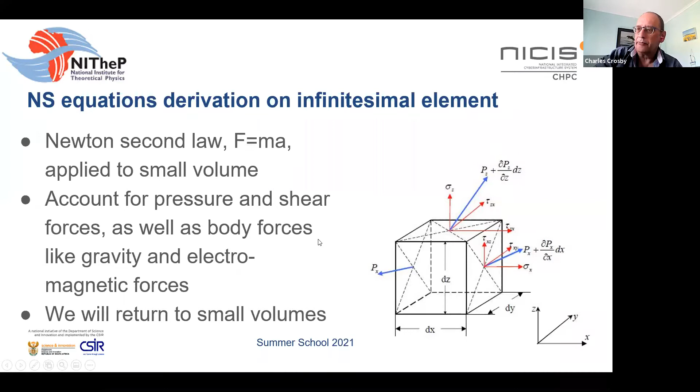Right, so this is one way of expressing the Navier-Stokes equations. This is a very longhand way of expressing it, but it is useful because if you're going to be programming it from scratch, this is where you would start, and actually you would start with a discrete form of this.

Although you've got a lot of terms there, you've got 4 separate equations: 1 continuity equation, which you can remember as conservation of mass, and then three momentum equations. They have been somewhat simplified, and there are 2 important simplifications that have been made. And the first important simplification is the density is constant.

This is incompressible flow. And this is a very big assumption, because we know when we're dealing with gases they are very much compressible. The density does change, and the density changes with pressure, and the density changes with temperature as well. But if we're not applying any fluxes of energy, we can disregard the changes in temperature, provided that the velocities are low enough.

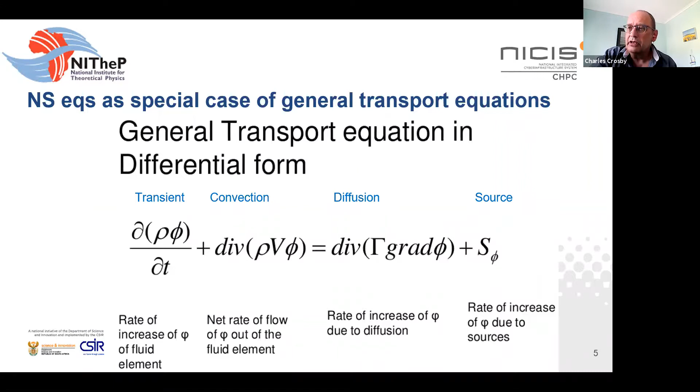So you've got a single equation which deals with both the volume of the control volume and its outer surface. So it's best expressed in integral form, which is how you use it in the finite volume method. So if you integrate it, it makes sense that you take the transient term and you integrate it over the volume of this control volume. Likewise, the source term, because it's a volume property, you integrate it over the volume.

But the surface fluxes are a little bit more awkward to handle. It doesn't make sense to integrate them over the volume. You would much prefer to integrate them over the surface. And this is where Green's theorem comes in. Green's theorem is a very useful theory that you find used in various forms of fluid dynamics, because it gets you away from having to deal with a volume integral when you're talking about a property that's not

really a volume property. So working with the normal vector on the surface of the control volume, the dot product with the quantity that we're dealing with, then we can start working with just a surface integral. So it makes it a form of the equation that's much more easily handled. So two volume integrals and two surface integrals.

Right, to summarize what we've talked about here, we've got a system of equations, so there's no single Navier-Stokes equation. You've always got a system of equations that you need to solve, and you need to find some kind of way of solving them together. You can solve them together in one matrix, or you can solve them sequentially. That's got fairly important implications. Especially on the convective side, there's very significant nonlinear terms, so you're always going to be stuck with some form of iterative method to solve them.

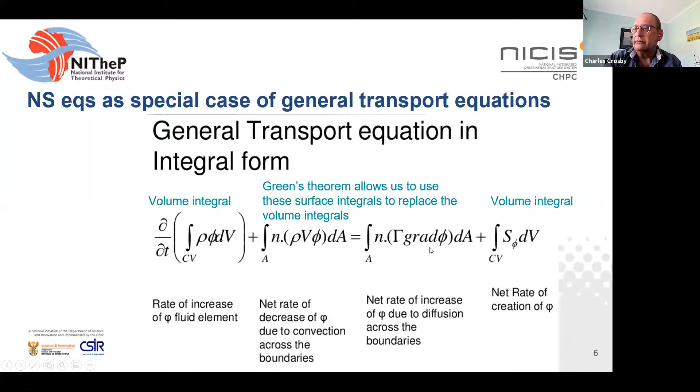But unfortunately, turbulence is a problem and we have to find ways of dealing with it. Fortunately, we found ways of dealing with it, but they do come with approximations. There are lots and lots of peculiarities of CFD, which we'll deal with in the third part of today's lectures. But one of them immediately pops up when you look at these equations. Let's just go back to this slide. This is simplified, but it illustrates the problem very clearly.

Basically, assuming that your viscosity and your density and your gravity and all that are known, you've got four equations and four unknowns. So your four unknowns are your three velocity vector components, u, v, and w, and your fourth variable is the pressure P. And conveniently, we've got four equations. So fundamentally, we've got a closed system. We should be able to solve this lot.

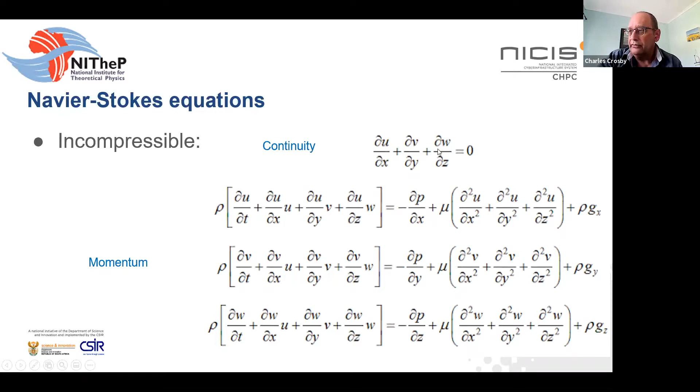The problem goes away when the flow becomes compressible because then density starts showing up in that equation and you can couple through the temperature and the energy, you can find the pressure. But if you're dealing with incompressible flows, which is where these methods started, you've got a fundamental problem that you don't have an equation for the pressure. You've got to find some kind of way of introducing it in there. We'll talk a bit about that in some of the later lectures. So that is the question of the pressure not involved in the continuity equation.

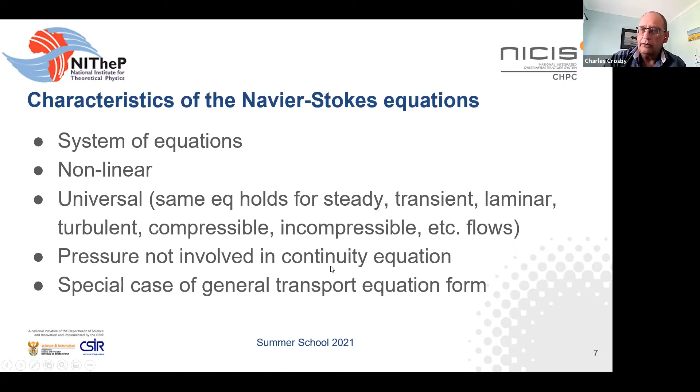And I've now basically given you a special case of a general transport equation, which is the Navier-Stokes equations, but you'll find that a lot of other things in the field of CFD start falling into the shape of a general transport equation. Right, so that's it for this part of the lecture.

Questions at this stage? Nobody? Should I pick a name at random and ask a question of that person? No, we're not going to do that. I just wanted to say that is a brilliant idea. I think that's not. I won't do that. I won't be that unkind. Okay. We won't be mean. Well, maybe we should be mean, but no, we won't be mean for now. Okay. If there are no further questions, let's get on to the second part of the lecture.

All right, is that clearly visible? Starting to sound like an optician.

Righto, I'm assuming that everybody can see this lecture 2.2 on turbulence. Right, I had to argue a little bit with myself about whether or not one should introduce turbulence into this series of lectures and whether it needs to come in once or twice, because I've already alluded to the fact in the previous part of the lecture that turbulence is inherently one of the things that makes CFD rather difficult. So it's easy to start talking about turbulence, because it really is a special thing which you don't really have an equivalent of in a lot of other computational domains.

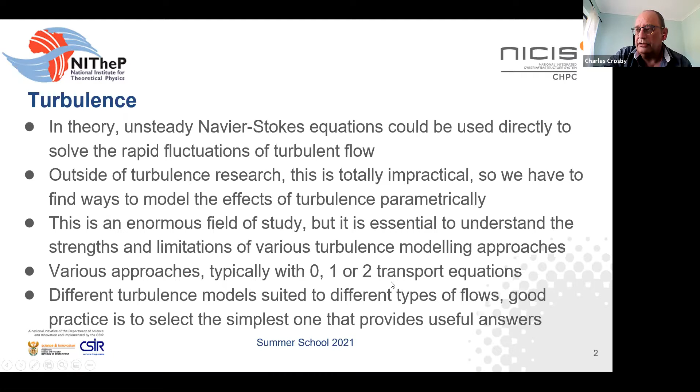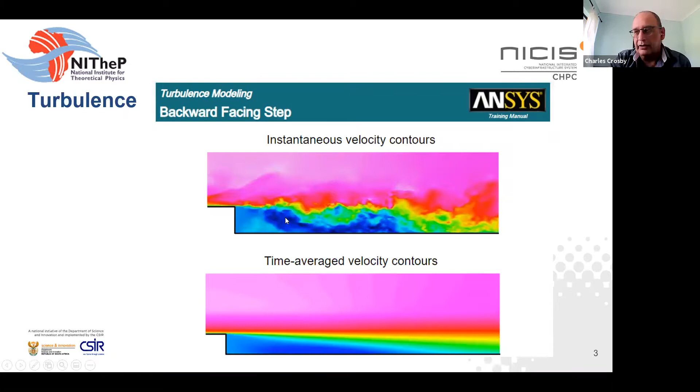So this is the trick with aircraft. They're nice and smooth and streamlined. So they don't have backward-facing steps. You don't have many regions on an aircraft that look like that, because they have to be nice and streamlined. Turns out you can simplify the equations a lot. And then you end up with an equation that can give you nice, fairly accurate pressure distributions over aircraft type geometries for incompressible flow.

And then if you assume that the disturbances normal to the mean flow direction are very small, you can come up with a compressibility correction factor, which is the square root of 1 minus the Mach number squared. And if you were to set yourself a threshold of that compressibility factor being effectively a change of 5%, then the Mach number that gives you that is 0.3.

So we like to use Mach 0.3 as a threshold of incompressible flow, because anything more than a Mach number of 0.3 is going to give you more than 5% of compressibility effects. So it's not a hard threshold, of course. In other words, if 2% compressibility is important to you for some reason, then it's actually technically compressible at a lower Mach number. In practice, you don't even need to go necessarily to a 5% threshold.

You could go to a larger threshold of compressibility for most practical purposes, and then you don't need to take too many compressibility effects into account until you actually start encountering shock waves in the flow, and then the whole thing breaks down.

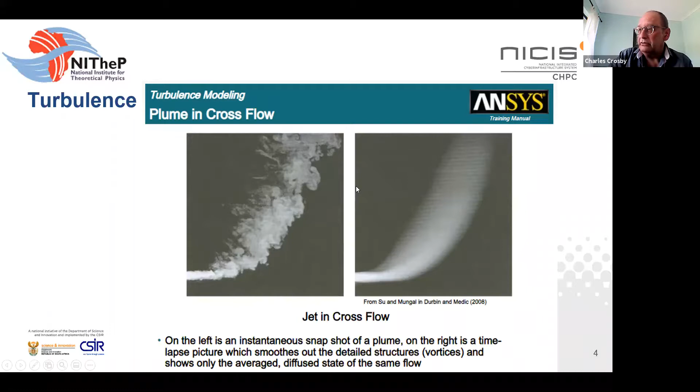Right, to move back to these lectures. The approaches that you can follow with turbulence modeling. For low Reynolds number flows, where the speed is small, the density is small, the sizes are small, but the viscosity is large, laminar flow is a really good assumption. All that the Reynolds number basically does is express a relationship between the inertial effects and the viscous effects. In other words, that which disturbs the flow divided by that which damps out those disturbances.

So at low Reynolds number, disturbances damp out, and the flow really is laminar. So there are quite a lot of real-world situations where laminar flows are important. And it can be a bit awkward because sometimes you don't want laminar flow. If you want chemical mixing, for example, you really don't want laminar flow. But if you've got small devices, you tend to get laminar flow.

Airfoils at small scales, typically model aircraft, some kinds of fans and things, also end up with laminar flow, and it turns out that there are some issues with laminar flows which make them quite difficult to deal with. So you'd actually rather prefer to have turbulent flow. From a simulation point of view, the laminar assumption is nice because you can use the laminar form of the equations. You don't have to worry about turbulence modeling.

So there are many real-world cases where you're dealing especially with small devices and low velocities where the laminar assumption is valid, and you should not use a turbulence model because the turbulence model is going to be inaccurate. And the turbulence model may not be accurate enough to effectively die off at laminar conditions. So then you should be using a laminar assumption. A good turbulence model will do that automatically. It will decay the turbulence to the point that the flow is effectively laminar.

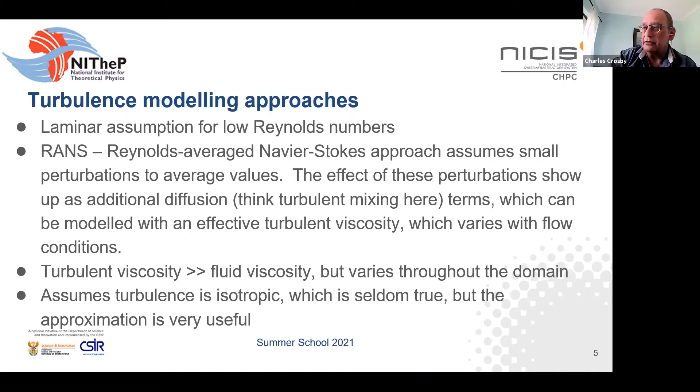Righto, so let's just go take a look, without getting into any great detail, at a form of turbulence modeling. This is a one equation model that's widely used in aviation, in aircraft analysis. It's the Spalart-Allmaras turbulence model, and it solves for a single transport equation of the eddy viscosity. So you're not dealing with higher level derivatives such as the turbulent kinetic energy. You're actually dealing with the turbulent viscosity itself. You assume an inflow boundary condition of very low turbulence viscosity, and then this gets amplified by gradients in the fluid, and it gets convected through the fluid.

So once again, you've got yourself a transport equation that's of a similar form to the other transport or conservation equations we've had before. You've got a transient term, a convection term, a diffusion term, and some source terms. And it turns out with turbulence, of course, you now get some very large source terms, because the source terms are now picking up a lot of the effects of the gradients. So these make the equations nonlinear. You've immediately got terms that you can see in here that are nonlinear. So it's like everything else in fluid dynamics, it's nonlinear, but it's quite a lot more nonlinear.

But this model has got a couple of advantages, and the one is that it's just a single transport equation, which makes it reasonably fast. It's got another advantage, which is that it works fairly well. So once again, you're primarily going to be using this with aircraft. Aircraft are streamlined. You don't have a lot of onset turbulence coming from somewhere else. So it's more important to take into account the effect of the turbulence that's generated in the immediate vicinity of the aircraft, close to the surface of the aircraft. And this has turned out to be particularly effective at predicting the flow separation on wings, fuselages, etc., which is one of the things that you'd really like to do with aircraft design.

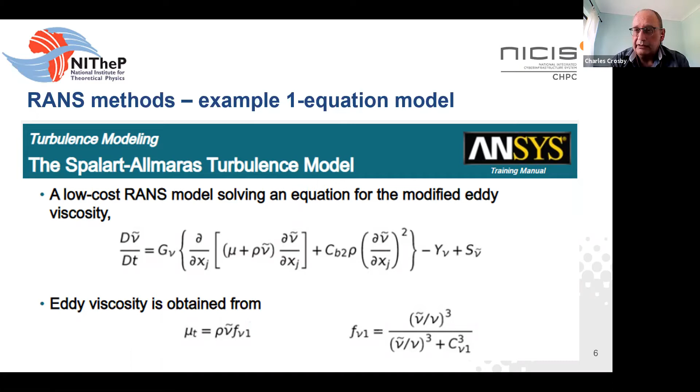So the Spalart-Allmaras model has been an unexpected success. It's worked extremely well in the industry. And interestingly enough, it gets a second life when it gets combined with additional models that do resolve the eddies out in the flow field. We'll talk a bit about detached eddy simulation in a moment.

Then you get into two equation models, and these models are the workhorses of CFD. This is where turbulence modeling first went effectively mainstream with the development of the K-epsilon turbulence model, which effectively says that you've got two things happening with the turbulence. You've got the turbulent kinetic energy, which is basically the generation of the turbulent effect. And then you've got a dissipation of that turbulence, which is epsilon. So you allow turbulence to be generated and you allow it to be dissipated. And the effective turbulence viscosity is a ratio of those two quantities.

So once again, you've got transport equations, you've got transient terms, convection terms, diffusion terms, and then a whole lot of nonlinear source terms. And then quite a lot of empirical constants, and deriving these constants has been one of the big developments in fluid dynamics, because a lot of them are not really theoretically derived. They have to be empirically calibrated, which gets you into the awkward situation that these models are not universally applicable. They work extremely well for certain types of flows. They can break down quite badly for other types of flows.

And these models have been further developed. The K-epsilon model was the original one. It was followed by models that try to address the shortcomings, such as the realizable K-epsilon model and the renormalization group K-epsilon model, which improved on a lot of the weaknesses and a few other things as well. And then a different family of methods, which is the K-omega models, which basically solve not for epsilon, but epsilon divided by K, a modified form of the turbulent dissipation. And this has also worked extremely well, but it's got its shortcomings. And then there's the shear stress transport model, which actually is a combination of the K-epsilon model and the K-omega family of models.

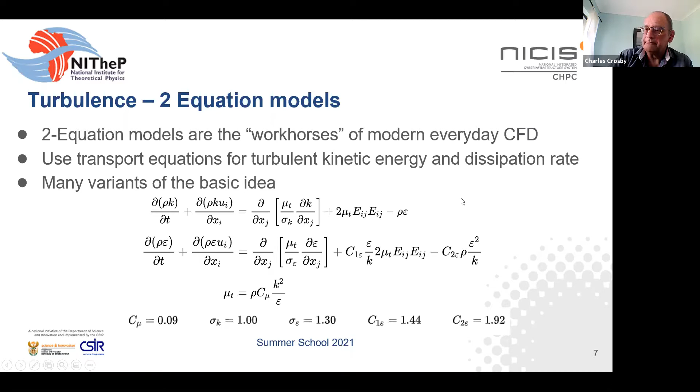Large eddy simulation. Large eddy simulation has become quite a big thing over the course of the last 20 years or so, largely because Reynolds-averaged Navier-Stokes modeling is a non-physical assumption. You can get some pictures that look nice and even, but actually they're very inaccurate. The effect on time average is not too bad, but there's quite a lot that you can lose in terms of trying to understand what's happening with the fluid dynamics.

So large eddy simulation is an attempt to resolve some of this. And this came originally from research into atmospheric flows, because as you know from watching weather charts, large eddies, swirling masses of atmospheric air, have a tremendous effect on the weather that we actually experience. So large eddy simulation became originally a thing in the modeling of atmospheric flows, and it became an issue in modeling normal fluid dynamics as well.

The basic approach is that you've got turbulence on various scales of length. If you've got large eddies, which are significantly larger than your grid resolution, then you can easily resolve them within basically a transient Navier-Stokes simulation. But there's stuff that happens at smaller than grid scale that is still important. So you end up having to combine this large eddy, which is really just unsteady Navier-Stokes, with turbulence modeling of what's happening at subgrid scale.

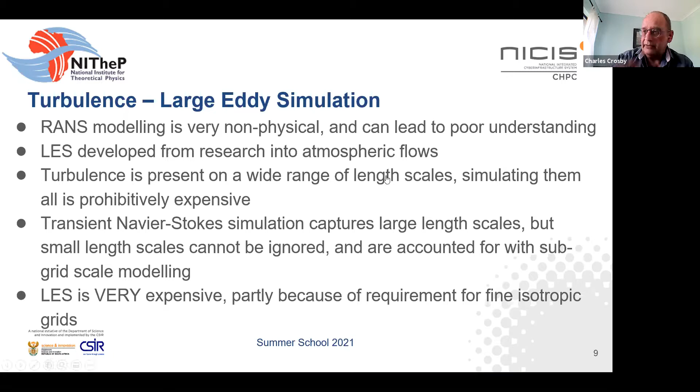But if you were trying to take that approach with large eddy simulation, you would completely lose all that effect, because you've now got different length scales for your different directions. So you have to end up with very fine isotropic meshes to capture large eddy simulation effectively. And that makes it very expensive simply because your meshes are very large. So that's led to the development of better techniques such as detached eddy simulation, which we'll talk about in a moment.

But if you're talking about planetary scales, this is research done on the hardware at the Center for High Performance Computing. Over the lifetime of the CHPC, our biggest single use of the computing capacity has been this particular research group, which is the Southern Ocean Carbon Climate Observatory.

The Southern Ocean, the southern part of the globe, is a very large part of the world's oceans, but it's quite poorly studied because it's a long, long way away from most people. But it turns out to be extremely important when it comes to absorbing carbon from the atmosphere. So obviously, as we get into the climate change situation, to try and understand what's happening we need to understand what's happening in the Southern Ocean. So one of the areas that's been researched has been to model the ocean currents in the Southern Ocean at sufficiently high resolution that you can actually capture these large eddies.

And it gets surprisingly complicated. You'd like to think of ocean currents as things that go down this coast and up that coast and up that coast and down this coast again. But it actually turns out to be a lot more complicated, with lots of vortices and eddies and various forms of mixing. And in fact, the vertical mixing is turning out to be even more complicated, where the effect of turbulence in the ocean has got an enormous effect on how the upper layers of the ocean get mixed.

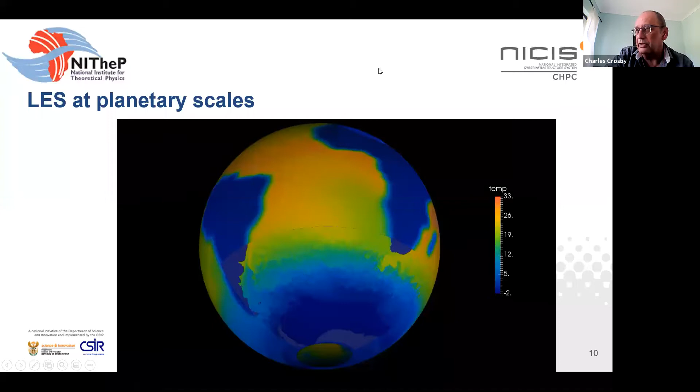So this is your area where you don't have a high resolution model, and where everything is done essentially with subgrid scale modeling. So you're modeling the effect of turbulence at subgrid scale. But here you're actually resolving with a much finer grid the formation of these eddies. And it turns out to be a crucial part of understanding what's happening in that ocean.

So the more sophisticated method that has become a bit of a workhorse is detached eddy simulation, which is a hybrid method again. So large eddy simulation is basically purely based on the size of the grid cells.

Anything below the mesh cell size is dealt with models, and everything above it is resolved. But it means that your boundary layers, your near wall regions, become very expensive. If you stay with Reynolds-averaged Navier-Stokes modeling near the walls, but resolve the eddies away from the walls, you find a much more efficient way of capturing what's happening in your flow.

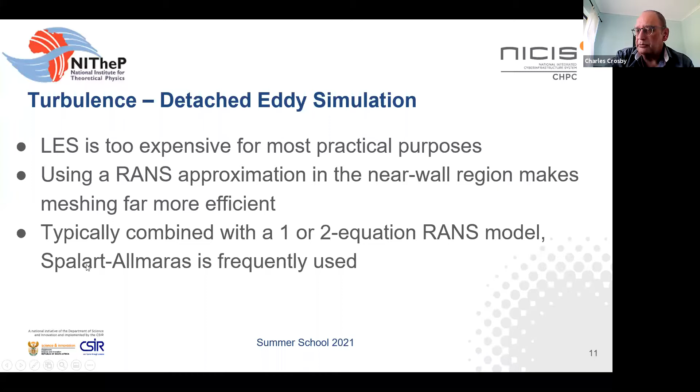And you can find that you can use a relatively simple method, a RANS turbulence model, in that region near the wall, as long as you're capturing your larger eddies away from the wall with detached eddy simulations. This is another application where the Spalart-Allmaras model has become quite effective. So this is just a YouTube video, so it'll take a moment to load.

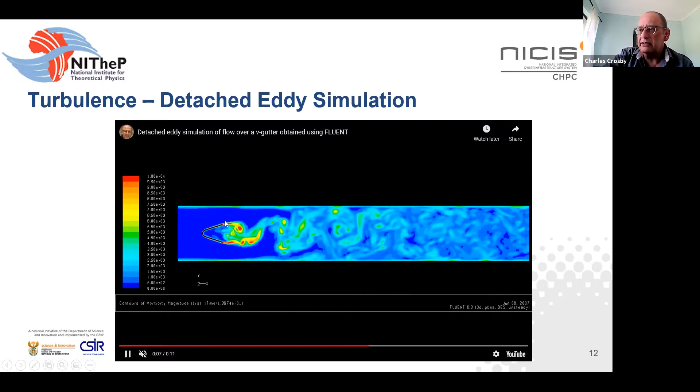So this is a V-shaped obstruction in a channel subjected to a uniform flow, and then the flow is simulated with a detached eddy simulation. So this rather shows you the strength of the method. If you were to follow a Reynolds-averaged Navier-Stokes approximation, all that you would get in this region would be a kind of a diffuse area of mixed flow. But in practice, there's an enormous amount of structure and complexity happening there, and it may be important to know more about that.

Right, so to summarize here, as I said, I was a little bit uncertain about whether one should introduce turbulence at this stage of the lectures because it is such an extremely complex field. But if you want to use CFD reliably, you've got to understand that turbulence is there and it needs a lot of attention. If we didn't have turbulence, CFD would be a lot simpler.

However, there are times, and I've basically described the ones, for example, low speeds, or by contrast, speeds where things are dominated by shock waves, where the answers may not be strongly determined by turbulence. You may only need to have a turbulence model in your equations simply to keep the model stable, because you can't get laminar flow at high Reynolds numbers, so you need something to do the turbulence. But actually the answers are being determined by something else, by geometry, shock waves, something else.

But then there are other cases, and the hydrocyclone is a classic one, where the turbulence is extremely important and you have to pay special attention to that. So you really have to make a point of questioning your own assumptions here. Okay, I'll stop that there.

Questions. I'm going to start picking on people here. We found it to be quite effective. What, to pick on people? We were not as kind as you were with the Python course. Yes, but you see, I think you had assignments to hand in at the end of the Python course. We're not going to do that here. Okay, so if I may ask a question, is everybody asleep? Evidently they are. Shall we just stop everything here? Solomon van Niekerk says he's not asleep, but do you have a question to ask? No. Maybe that's the answer to the question if they're asleep, not the question if they have questions. I'm really happy that you're not asleep. Yeah, this is not easy stuff to get across in a way that will keep people interested, but unfortunately it's necessary to know about it.

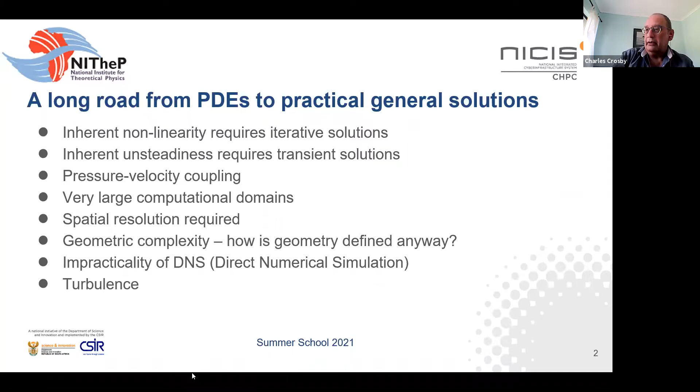Okay. Yeah. Now, there's just a question. Let's get into it. I'm looking at that question, trying to figure out how I'm going to ignore it. Okay, can I write the answer to it? Please do.

Okay, so Andrew will handle that question. Thanks very much. Because it's getting into a bit more detail than we can easily handle in the lecture here.

Right. Large computational domains and spatial resolution. So this is a typical C-shaped grid around an airfoil, a symmetrical wing, at the kind of resolutions that you would use in real life. In fact, your domain is so large that you cannot even see the little wing in the center.

So NASA recommends, if you're doing aerodynamics work, that the boundaries of your computational domains should be at least 100 chord lengths away from the body of interest. So the influence of the boundary on the surface of interest obviously decays asymptotically with distance. So you may be able to get quite good answers if you only go 5 chord lengths away. But to get to the point where you've definitely got no influence, you've got to go as far as 100 chord lengths. And if you're following these recommendations very strictly, you end up with very, very large domains.

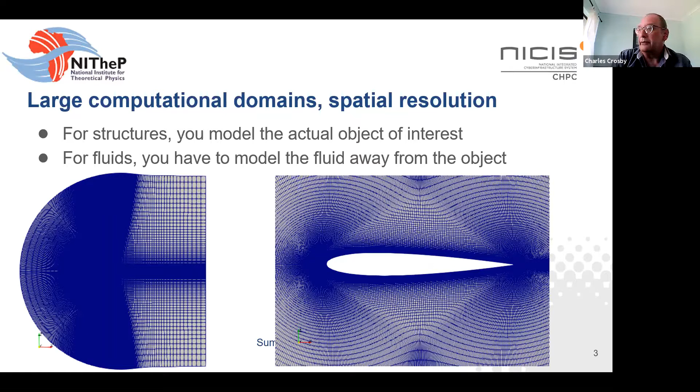Geometric precision. This is a very simple example of the kind of thing that you're dealing with, but it's related to the reality of computer-aided design models. Computer-aided design models, CAD models, handle curved surfaces with non-uniform rational B-splines. They interpolate the surfaces, so you get smooth surfaces, but they're not precisely expressed. And the way that the different codes express these things, the way it's been implemented, is not always the same.

So by the time you get a CAD model from the CAD design office, you bring it into your pre-processing software for your CFD method, you may find that surfaces overlap, or they fold, or they cut each other where they shouldn't do so. And you cannot do the CFD analysis until you resolve all these difficulties. It's a very labor-intensive task. There's quite a lot of tools that you can get to help you now. The best possible tool is to take control of the geometry yourself so that you can do your CAD model with the intention of modeling the geometry consistently and accurately.

In a design office of any nature, it could be architecture, mechanical, electronic, whatever, your main purpose of the CAD model is to do a layout, and then to be able to generate shop drawings automatically and to provide the organization with a bill of materials. It's not primarily there to get your precision. So the worst models I've seen are the ones that come from architects, because architects have got their special CAD software with all sorts of special models built in, so they can easily do double glazed windows, toilets with handles, sliding doors with handles, and all that.

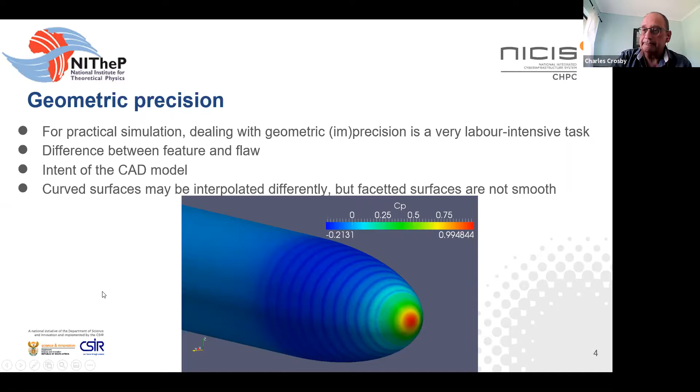Right, to wind up today's lecture, the steps along the road of dealing with CFD solutions can be summarized with the following. You have to have a domain around the thing that you're interested in. Could be that you're dealing with an internal flow; it doesn't change anything. You've got a domain, a collection of grid cells, certainly a body of fluid or a body of solid, and that has to be discretized in the form of meshing. There are different ways of meshing it. You can do it with Cartesian meshing, curvilinear meshing. You can use multiple curvilinear blocks. We'll talk about that in the next lecture, and I'll show some of this next week. Or you can use unstructured polyhedral, tetrahedral, cut cell meshing.

There are different ways of meshing the domain, and this relates to a question that came up on Monday, which is what is the best element to use? And it turns out there's no simple answer to the question, because it's amongst other things related to whether you're using finite volume or finite element approximation to the problem, and also what the geometry looks like.

So one of the real life difficulties is that objects in real life have topology. By topology, I mean people have bodies and they've got arms. Aircraft have got bodies which are long and round, and they've got wings which are long in a different direction. And isotropic meshing, when you're dealing with bodies that have topology, is very inefficient because your spacing tends to be the same in every direction, but things don't vary the same in every direction. There's a lot to meshing. It's a big field. But that's the first step along the road towards getting workable CFD solutions.

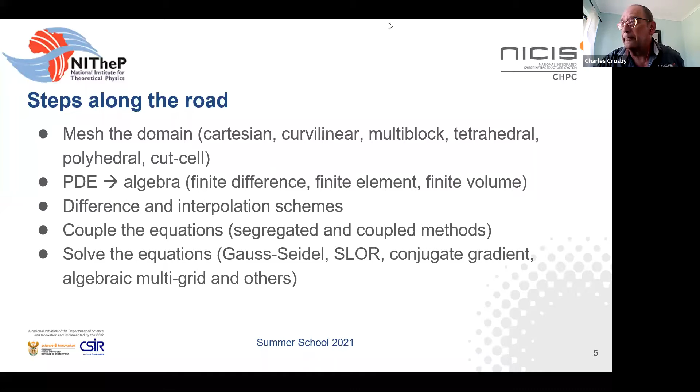So I see Jack's asking, is it often that we're going to come across answers that aren't accurate but still useful? I've noticed that as a trend towards the beginning of slides 2.2, like laminar flow. Yes, that's life. How accurate is accurate enough? There's a difference between science and engineering. In fundamental science, you are trying to find what is. In engineering, you're trying to answer the question, what can you do with it? So already you've got two different approaches there. The important thing is to know what you're trying to do with the results.

It's extremely expensive to always try to get answers to a high degree of accuracy. It may be so expensive that you can't generate enough of them. I like to follow the approach that if you're in the industrial environment doing modeling and simulation in a product development environment, you're going to follow a trend of escalating precision. You want to start off coarse to explore a large design space. You're trying to rank alternative options, pick the ones that are more likely to work. As you proceed along the development process, you refine your answers to make more accurate predictions about whether you're going to meet your performance targets. So it's always important to bear in mind fit for purpose. What are you going to be using results for?